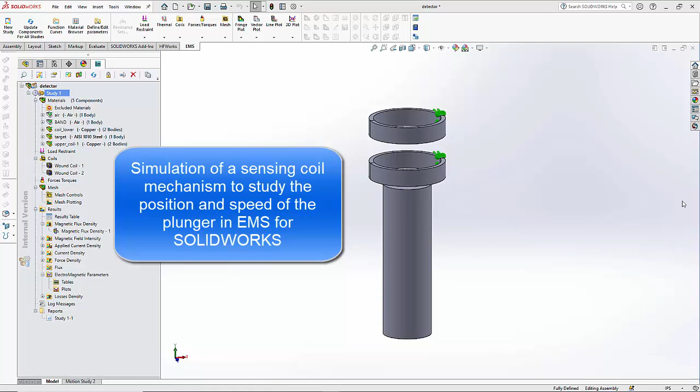In this video, we will see how EMS can be used to study sensing coils. In this model, we have two coils. We have the lower coil and the upper coil. We also have a plunger that at its initial position is shown here. As the plunger moves up, it comes in the vicinity of the two coils, and the voltage and the current measured in the coil determines the position of the plunger as well as the speed of the plunger.

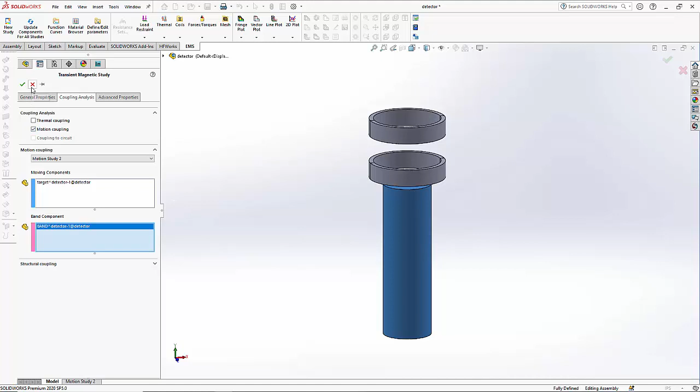So in this example, we will see how EMS for SolidWorks using the transient magnetic simulation will help us understand what's the current in both these sensing coils as the plunger moves up. So we start off with creating a transient magnetic study. Now this transient magnetic study is coupled to a SolidWorks motion study. This enables us to impart motion to the plunger. Let us now take a look at the SolidWorks motion study to understand what kind of motion is given to the plunger.

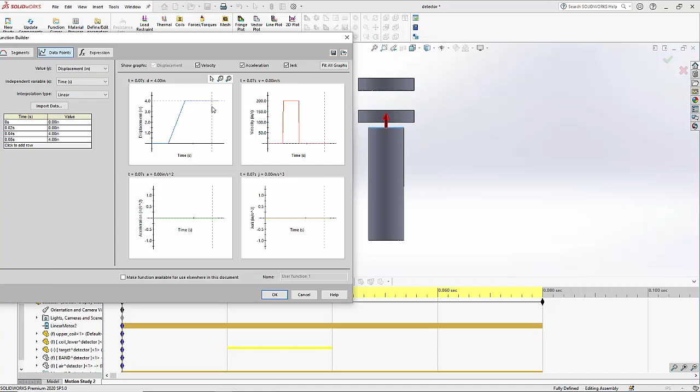So the plunger actually starts from rest and it's at its current position for a period of about 0.02 seconds or 20 milliseconds. Now from a time of 20 milliseconds to 40 milliseconds, the plunger moves 4 inches. Okay? And finally, from 40 to 80 milliseconds, the plunger stays at its position, which is the topmost position.

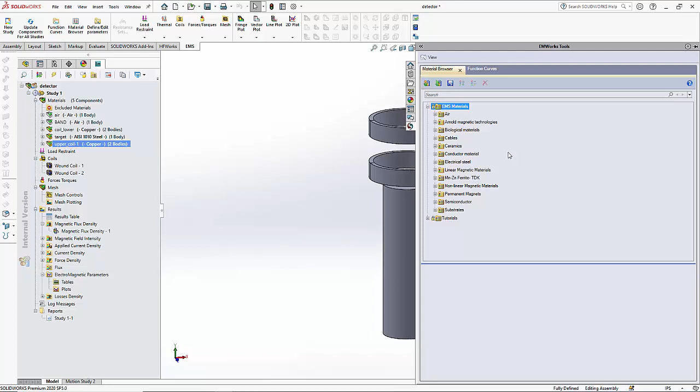Now let us look at the materials. The coils, obviously, both the lower as well as the upper coil, they are made of copper. EMS has its own material library which contains a plethora of commonly used materials in the field of electromagnetics. This material library is fully customizable, so users can actually create their own materials and use them for simulation.

Now let us take a look at the definition of the coils. We'll start with the lower coil. The lower coil is actually excited using an AC voltage source. Now it has a frequency of 50 Hz and the amplitude of the AC voltage is 40 volts. The coil also contains 300 turns of 22 gauge copper.

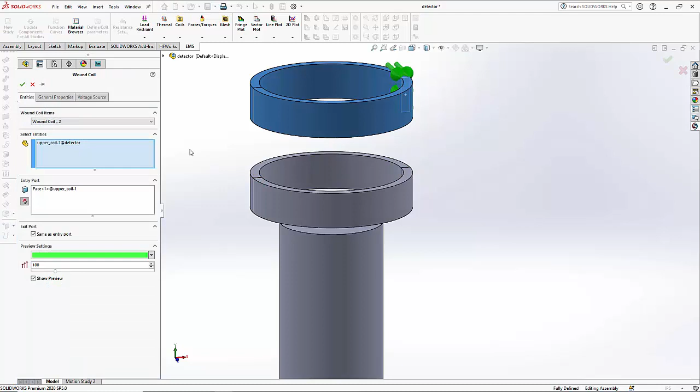A similar coil is applied to the top coil as well because they are similar in dimensions. It contains 22 gauge copper, 300 turns, and it is excited with the AC voltage of 50 Hz with the amplitude of 40 volts. So this completes the setup of the problem. Now we have solved this problem and I will jump straight into the results.

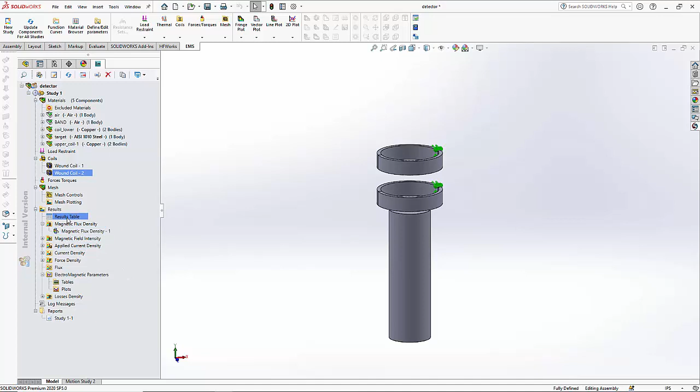The results are organized in EMS in what we call the result table. In the result table, one can study the motion of the plunger. For example, here is a plot of the center of mass of the plunger, and that mirrors what we applied as motion. For the first 20 milliseconds, the plunger is stationary. That helps us to understand the amplitude and frequency of the current. And during the motion from 20 to 40 milliseconds, the plunger is in a uniform motion. And finally, from 40 to 80 milliseconds, it stays at its topmost closed position at rest.

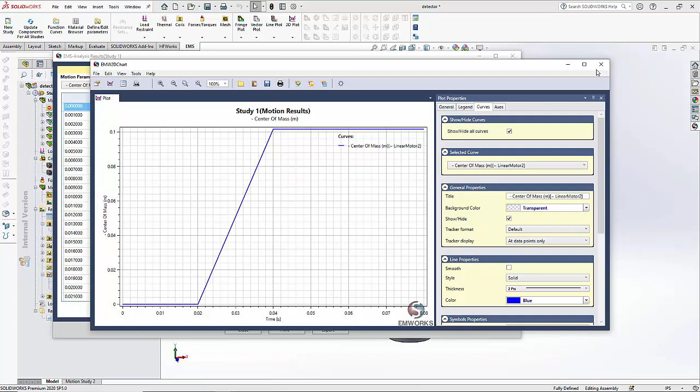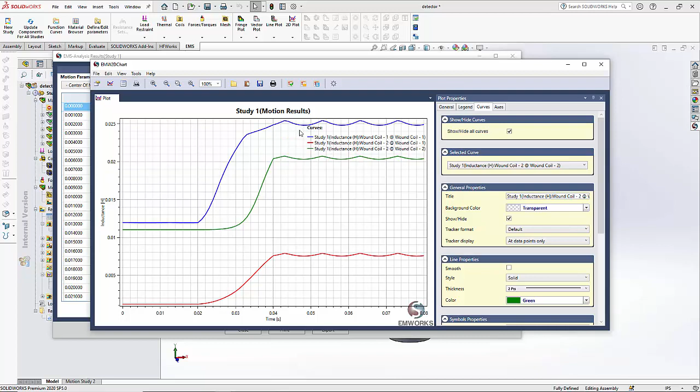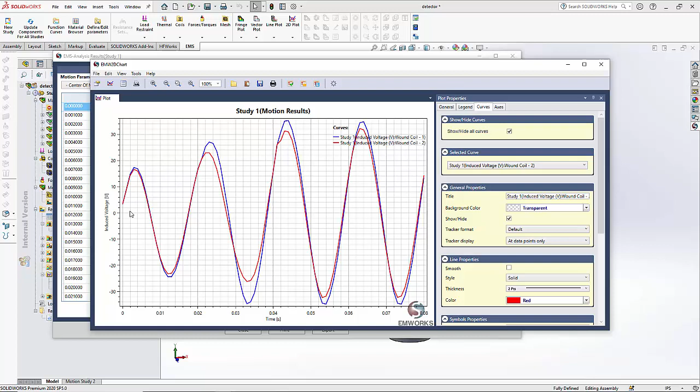Also, the induced voltage can be studied. So the induced voltage in both these coils is now plotted, and you can see how the induced voltage in both the coils varies as a function of time. Okay. So the applied voltage was 40 volts and 50 hertz frequency, and you can see what's the induced voltage in the two coils.

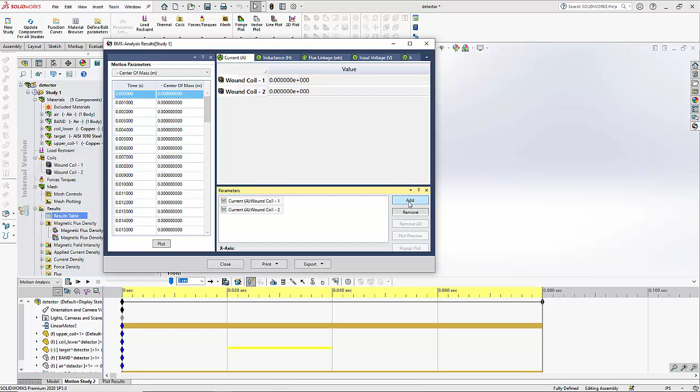Since we are inside the SolidWorks motion environment, we can also visualize the motion. This is the motion of the plunger, and we also saw in the results table how the current, inductance, induced voltage, etc. vary as the plunger moves from its rest position to its topmost position.